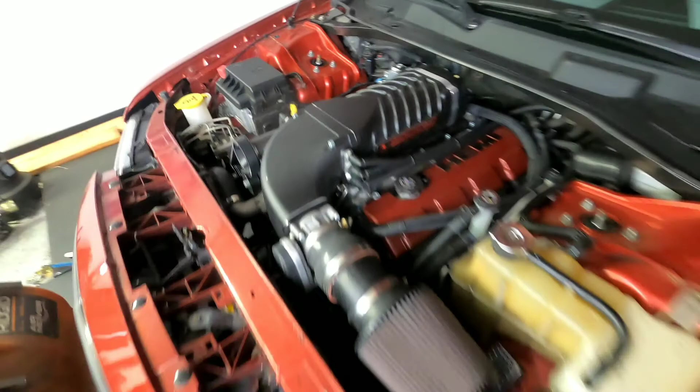Today we're going to talk about something that I get a lot of questions about, and that is dyno corrections. What are they? Why do we run them? What's the purpose of them? And our test car for this to show is a Chrysler 300C with, ooh, look at that boy, oh, Whipple. We're not going to be showing any runs of this car. I'm just going to show you what we have for data.

Alright, so here we are, and sorry about the screen. I need to get a screen capture program to make these a little bit prettier, better, easier to read.

But here we are. So this was this 300C, and when it came in the last time and I tuned it, we had a peak power of right up here, around 560 horsepower. So 503 foot-pounds of torque. And this is a corrected value. So what does it mean to have a corrected value?

Well, let's show you. If I come over here to power, and we look at the uncorrected power and the uncorrected torque, what we'll see is the numbers just went up. Now we're to 569 and 511 foot-pounds. Well, this is how much power it actually made. This is what the vehicle put down on the rollers at the moment that it was here on the dyno.

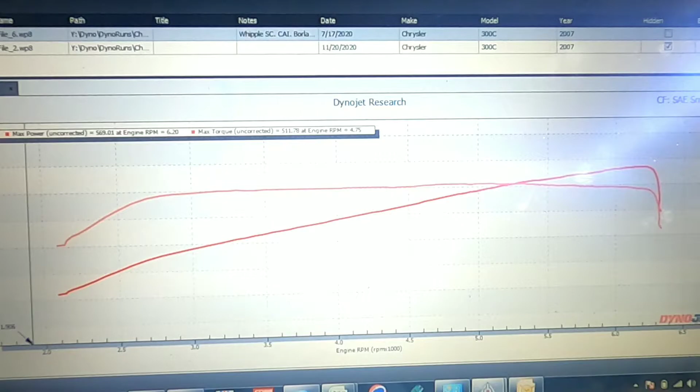And what we can do is we can look at some of the other parameters for this car. We have the air-fuel ratio here, shows you where we're at. And we have our boost level here, about 8.77 pounds per square inch of boost. So that tells us what we were making for boost and what we were making for air fuels, but that's not really what we're looking for as far as what decides the correction.

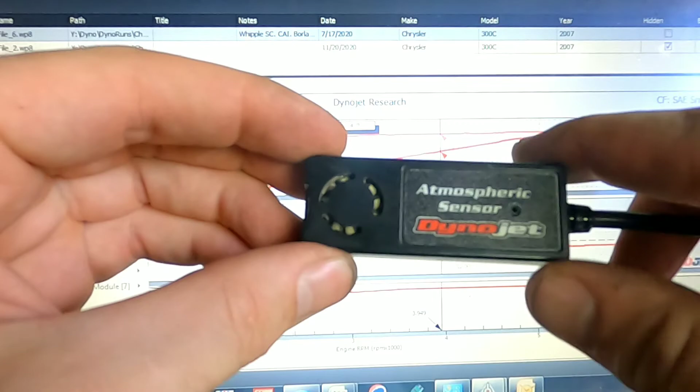So the dyno has a weather probe, and the weather probe, in fact, let me grab it and show you here. This here is the weather station. Oops, we're upside down. So it's got a temperature sensor, a barometric pressure sensor, and a humidity sensor inside it, and a little fan. And the fan just draws the air in that's around it, and then it connects to the dyno itself.

And what this does is it helps us calculate accurately what the air density in the dyno cell is. So some people run numbers based off of what the air density outside is, but that's not even really accurate because you have to calculate what's actually in the room where you're currently set up. So if we look here, we have our humidity, 36.85, and this was on July 17th.

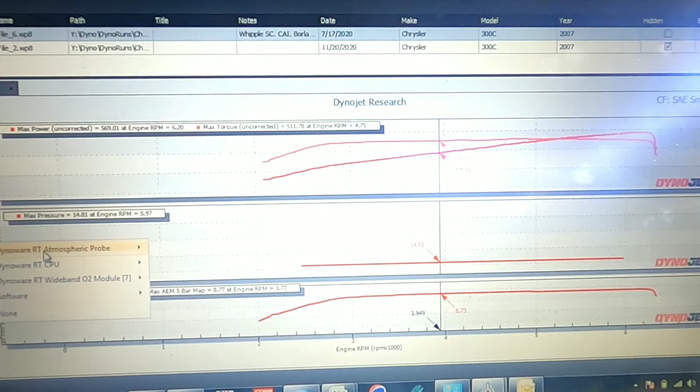So let's go back over here. We have pressure. Pressure was 14.81. We have really high atmospheric pressure here. We're basically at sea level. Temperature, 81.4. So it kind of tells you it was a little bit warm day. It wasn't super hot, but overall what that does is it takes a standard correction. And when we show our standard correction right here in correction factor, it was a 0.98.

Now, when the car came back, I want to show you what we have. We're going to unhide it. Boom, there we go. So the car came back and it made 588.06 horsepower. In fact, let me hide the other one. And 536 foot-pounds of torque. So it made more power when it came back, right? Well, if you look here, our correction factor is now 0.95.

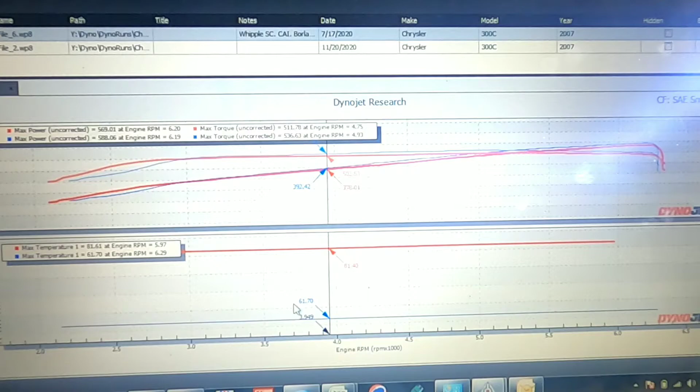And the reason why it's 0.95, let me pull up. In fact, let me go to double graph so it's easier to read. If we unhide it, so we were 0.98 last time, and this time we're 0.95. And if we look at the reasons why it's 0.95, our humidity, well, we're a little bit more humid than it was. It was a little drier last time. And pressure, we're actually a little higher pressure even than last time. And the coup de grace, temperature, way colder, 61.7 degrees versus 81.4. So naturally, it's going to make a little bit more power.

In fact, because this is supercharged, it actually did something else too. Let's show you the real fun one here. If we look under dyno, MISC, you have to find these sometimes. Under pressure, we actually made almost 3/4 of a pound more boost. This part right here is just how fast I floored it.

If you were to have graphed throttle position, I wasn't fully floored till a little bit later on that pull, but anyway, you can see it's making more boost. And the reason why it's making more boost, even though it's supercharged, is because we have higher atmospheric density. We have higher air density. So more boost equals more power, right?

So if we look at this, it's not really comparable. This is the same car, same tune, same setup, everything's the same. So it made a different amount of power. So that makes it really hard to compare runs from one day to another. But that's where the fun corrected numbers come in.

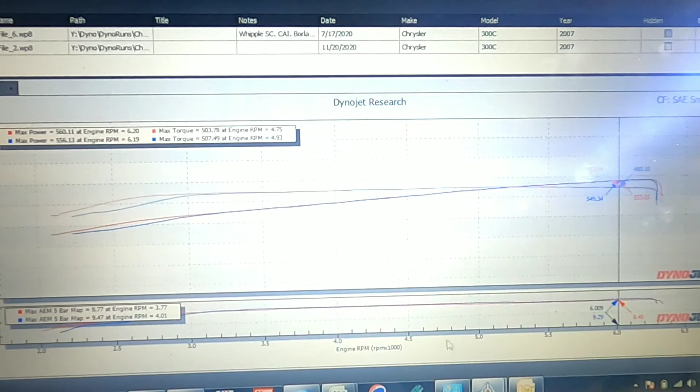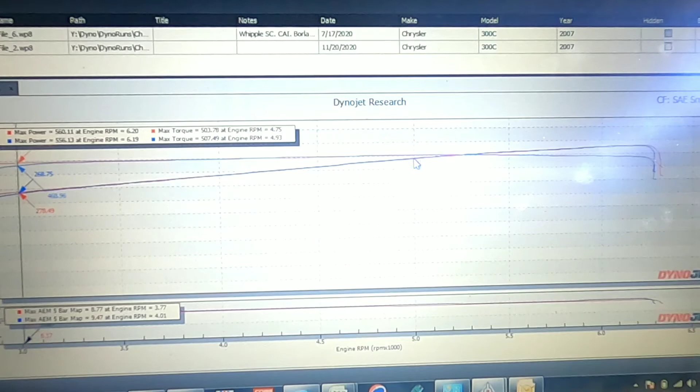So when we look at the power corrected and we look at the torque corrected, we see that those two are very similar now. In fact, if I zoom outside of where I didn't floor it at the same time, we are almost identical. It's pretty wild. Very similar numbers when it's all corrected. And that's the advantage of having a really proper dyno.

In fact, up here, it ran a little bit less timing because it was making more boost. And so it did make a little bit less power, although it is making more power. Because if you look at the uncorrected numbers, it is definitely making more power. But let's go back to corrected.

So that's why we run corrections on the dyno, so that when the car comes in one day and it comes back 6 months later, yeah, pretty close. It was July when it came in the first time, and then it was November when it came in this time. We can put it on the dyno and have a good comparison. So let's say the customer had actually changed something on the car. Now we'd be able to see if it gained or lost power based on the corrected values.

Let's say we had ran them uncorrected and he added an intake, and instead of making 588, it made 580, we'd think the car gained power. We'd think it gained 11 horsepower. But in reality, it would have actually lost a little bit of power if you were to correct the numbers. So it's really important that whatever dyno you go to runs corrections.

The other thing we'll get into real quick is something called smoothing. So you see on Dynojets and some other dynos, they have a smoothing factor. And what this is, the dyno graph is actually just a bunch of data. It's a raw data file. And in that data file, it has samples. Each time it takes a sample, it basically graphs a point. And so what smoothing does is it changes the interpolation between the points. So how much it's going to wiggle between the points.

So if I go over here and I go to unsmoothed, see it's a little bit wigglier because I had a high, a low, a high, a low, you see. And so it often yields slightly higher numbers, not a lot higher. We're like a horsepower higher, yeah, 1. But this number is technically more accurate because this is all of the individual samples with a hard line drawn between them.

But some cars, say your wheel is a little bit crooked or you have a flat spot in a tire, it'll show up on the dyno and you'll see crazy spikes and jitters. 4-cylinder cars spike and jitter more because you actually have individual acceleration events from each cylinder firing, whereas this is a V8, and so there are 8 cylinders to distribute it among, so they look a little bit smoother.

So anyway, let's unzoom here. Come on. Unzoom again. Go all the way back. There we go. So, uncorrected looks a little bit different. So that's what I have for you guys today.